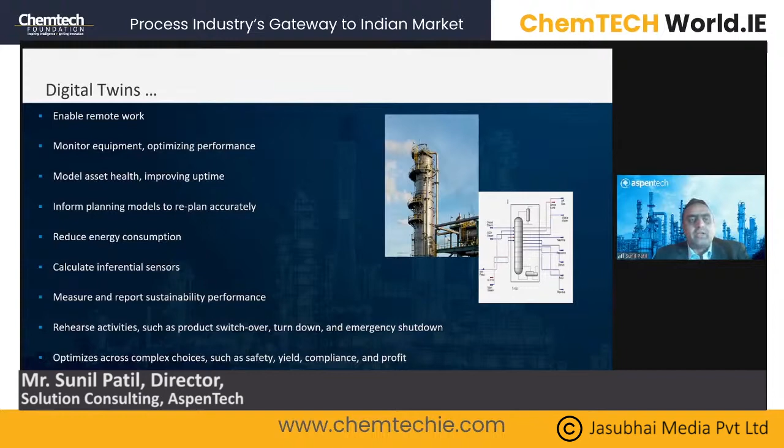Then planning or energy consumption, energy optimization, soft sensors, measuring and reporting sustainability performance—things like emissions, because those are key things one wants to track. So it's a broader thing. It's not about the process model, not about representing a plant, but looking holistically about the entire plant, as if operating it remotely. That's how people talk about the digital twin.

I'll share a picture here that some of you familiar with Aspen Technology might have seen. As you look at this picture, there are three parts: what you see in green color we call plant digital twin, in blue color we call operational digital twin, and in purple color we call process equipment digital twin or operational integrity digital twin.

What this really means is AspenTech is offering a complete digital twin for an asset, not just for a process unit or an equipment, but looking holistically at an entire asset. So this is our view of how a company could look at the concept of digital twin, and it's a considerably broader and more encompassing picture than what is typically projected.

Going back to the blue portion, the operational digital twin—it is mainly about optimizing the operations in the facility, operating assets, as well as planning, scheduling, controlling, execution, distribution, and demand management. All this becomes part of the operational digital twin.

When you look at the purple circle, it is about the predictive and prescriptive digital twins of the plant, where people look at reliability of the equipment or early event detection. So those are the things we look into for the operational integrity digital twin.

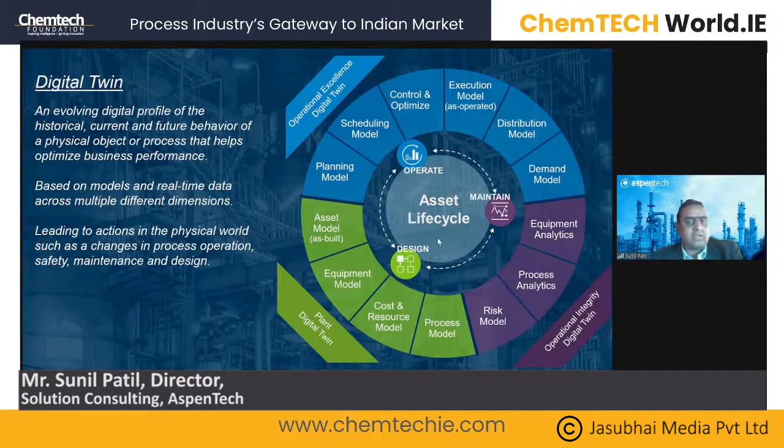Moving forward, I'll share some examples. In the previous slide, we talked about the process digital twin. As you can see from this screen, one example is the plant digital twin. You can see a picture from process simulation, for example an Aspen Plus process model, wherein we actually simulate the real plant.

Real plant using real plant data. One can get the data from a data historian on DCS or SCADA from the plant, connect that data historian to the simulation model, and optimize parameters from the process model. One can actually publish it in the dashboard. Here you can see another picture where I see my current plant performance, what the optimized values are, how much the gap is, and what action needs to be taken.

This is what we call actionable insights. This really gives actionable insights to the operators, process engineers, and operations people in the plant, based on real-time data as well as first principle models. This is a classic example of what we call a plant digital twin model.

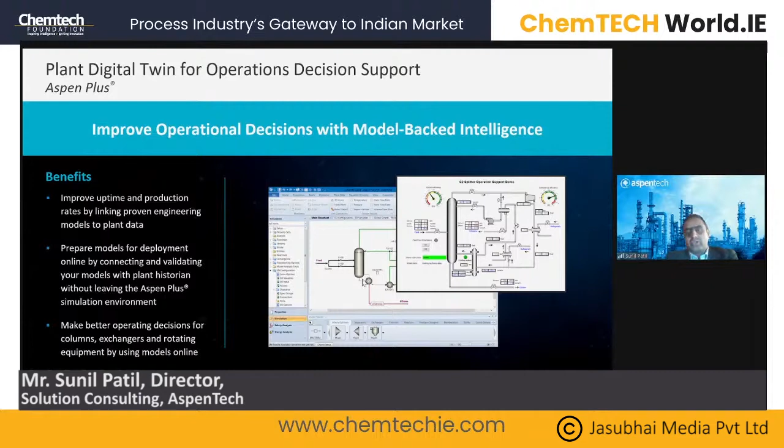This is another example, since I'm talking more about chemicals today. In chemicals, there are a variety of operations - it could be a batch process, semi-batch, or continuous, as well as a lot of solid unit operations like drying, crystallization, and so on. So there's complexity. As I mentioned earlier, when you move from upstream to chemicals, the complexity increases - the process complexity goes up, the reactions, the kinetics, the solid handling processes become more and more complex.

But how do you handle that? How do you simulate that? Do you have accurate properties available? Do you have data availability? Because the convergence, the kinetics, the reaction - it's not straightforward when we move to fine chemicals, specialty chemicals, or even pharma ingredients.

This is actually handled in one environment in Aspen platforms - what we call an integrated process platform, where you handle batch processes, continuous, semi-batch, and solid unit operations in one environment. This really helps to quickly and easily simulate batch as well as continuous processes in one environment. Convergence becomes faster, and of course you reduce the dependency on experimental iterations and so on.

I'll share some examples in a while. For example, companies have achieved significant batch cycle reductions, companies have improved the yield, companies have reduced the energy, and quality has been improved. So those are the key things one can achieve with this kind of solutions.

This is a broader picture. As you can see, I was talking about batch and continuous process in one environment, and one can see the properties - you can have a 3D diagram to really track properties. For some applications, for example, I want to study a transition process from batch to continuous - how do I do that? Or evaluate product purifications or solvent recoveries with different types of solvents or different types of solutions I want to try and test.

One cannot really do all such experiments in the plant, but this is an environment where one can actually test, try, evaluate, optimize, and come up with a solution to implement in the plant. This platform helps process engineers or chemical engineers really optimize different types of chemical processes. Obviously companies have been doing this offline, but now since we're talking more about digitization and digital twin, this has really become online.

What this really means is it's a real-time optimizer where it connects the process model to MES solutions like a data historian, where the models fetch the data from the plant and run at defined frequencies to produce actionable insights for process engineers or operators.

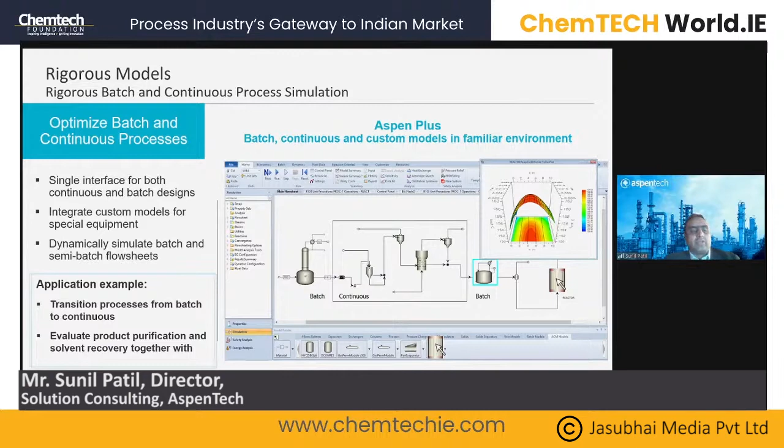For a new polymer grade development, right? Similarly, Hanwha Chemicals from Korea increased the production of LDPE by 5 to 7%, and that translated to significant benefits to them, right?

Dow Chemical did a site-wide safety study using this AspenTech digital technology, which helped them evaluate mixing hazards to avoid accidents and so on. Then Mitsui Chemical Japan were able to reduce energy by 1.5%, which is significant.

So there are a lot of examples, right? We can share this with you, and these are what we call published case studies or success stories available for us to refer—how these companies have achieved significant benefits using this digital technology. The examples are there from bulk chemicals, polymers, specialty chemicals, and large petrochemical plants and so on.

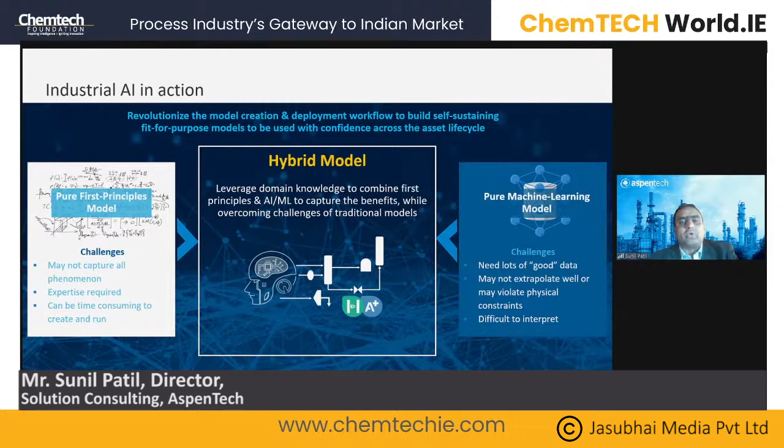Okay, so hybrid models—I talked about that. It's about combining your first principle model and bringing your domain expertise and data into one environment. It's basically about combining your data and model, including the ability to capture complex behavior that in many cases couldn't be modeled. For example, some phenomena or properties like color or morphology are typically very hard to capture in a first principle model, but the hybrid model, together with the data model, certainly helps address those kinds of challenges.

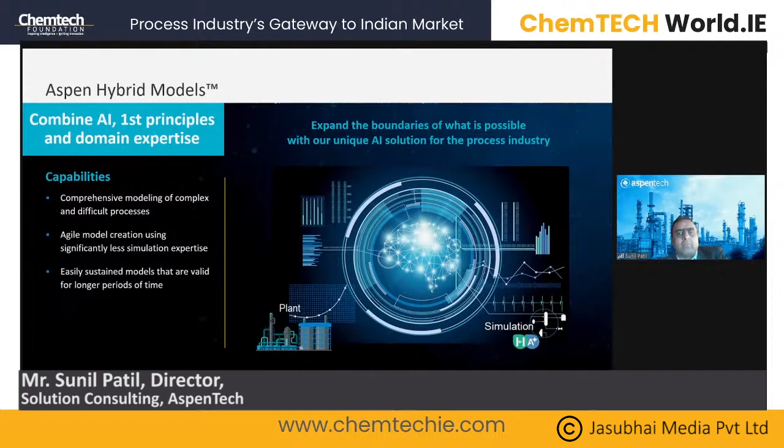Again, as I said earlier, it is about combining your AI, artificial intelligence, and the data with the first principle model. That's what we really bring together to solve these industry challenges of complex models, or models which are hard to simulate, right? Very specific geometries, or ones which are very proprietary. And those could be addressed using this kind of a combination.

Okay. Yeah, and I said already, the problems that cannot be easily modeled can be modeled here. Difficult and complex processes, we can simulate here. The process engineers can model processes and assets that cannot easily be modeled with first principles alone. You get the accuracy of empirical models, the strength of first principle models, leveraging the power of AI with the different algorithms built in here.

And of course, as you know, AspenTech has more than 40 years of domain expertise in this area. So combining all this together, this is what we call the new innovation we have done in the process simulation or process modeling area, helping our customers solve any kind of complex process, be it very complex equipment or a large asset, helping companies increase yield by 1 to 5%, increase throughput, as well as reduce energy demand. Okay, so that's how companies are really trying to achieve it.

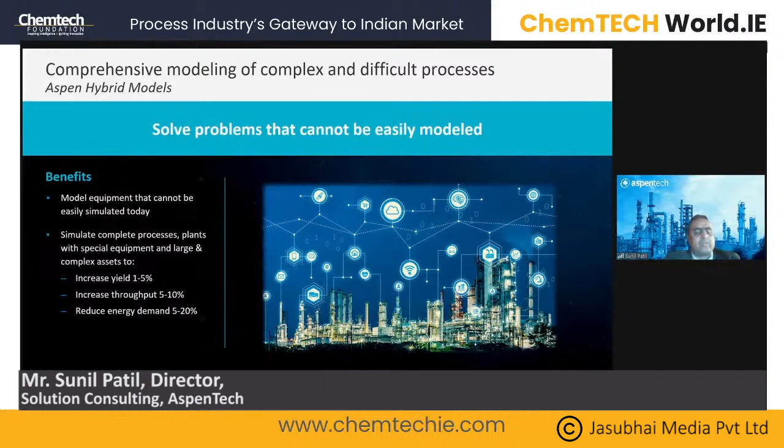Now, if you look at sustainability, it is also important the model has to be sustainable. Because the new generation are really technology savvy people, but it is also important that they have the skills to sustain and maintain the models. So AspenTech is ensuring that when the models are developed and implemented in the plant, they are easy to maintain, easy to calibrate, or faster to calibrate at a defined frequency and so on.

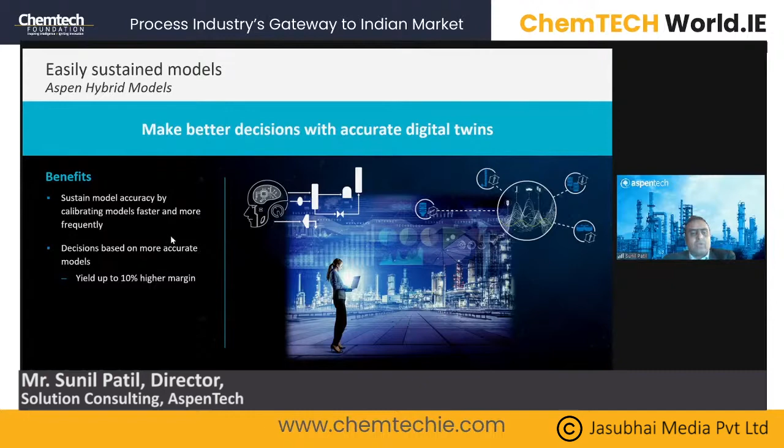So it is very important for us that we develop the model, but at the same time, it is easy to maintain and sustain by auto calibration, or by making sure that it is easy to calibrate for the engineers. Okay, this is another example.

As you can see, this is again an example of a hybrid model. In the diagram, there are different process equipments simulated using your first principle model, for example the distillation column, pumps, heat exchangers, and so on. But at the same time, we have a model built into the hybrid environment, what we call a data-based model. So we can build it in the AI model builder and bring that into the process

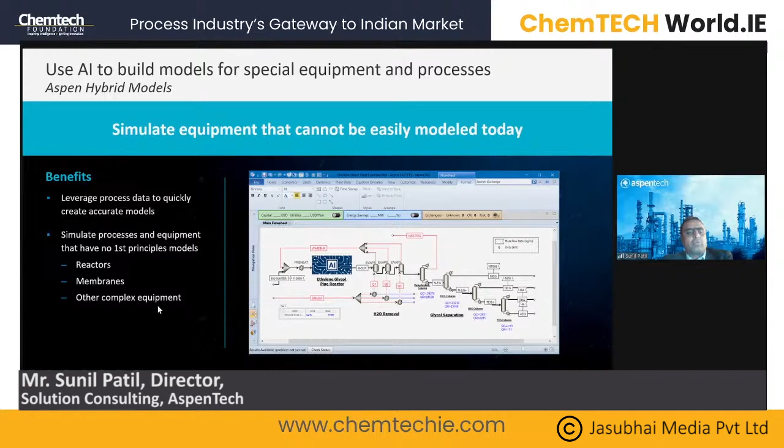simulation environment. And this combined model, a combination of first principle and data model, is simulated in the process simulation environment, what we call a hybrid model. So as you can see, you can have reactors, membrane kinds of units, or all kinds of complex process equipment simulated in one environment.

Okay, so let's talk about an example. Do we have a real example of these hybrid models? Yeah, of course, we have a lot of examples. From a confidentiality perspective, we may not be able to share the company name, but this is an example from a large petrochemical company in Asia. This is a polymer plant where they deployed this hybrid modeling technology, the first principle combined with the data model. The goals were to reduce the transition time, reduce the waste of polymer grades,

and at the same time, they had the LDPE reactor model, which does not calculate the key properties. So the solution was the standard LDPE model developed in Aspen Polymers. They used this AI-driven model in the same environment, and the benefits, as you can see on the left-hand side, the value created is significant. A 50% grade transition time reduction, which is significant.

The savings are almost $723,000 US per year, which is again significant for such a plant. And they also achieved the waste reduction target, basically their sustainability goals. So this is very important.

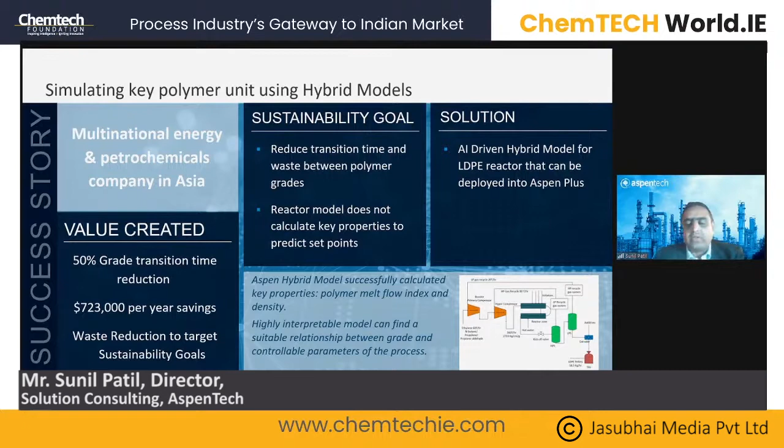So we can talk, or we can find out what could be the use case where these data-driven and first principle models can be used. Okay. Then next, finally, about the plant digital twin.

Now here, this is again a classic thing about the plant digital twin, for example, the column. This is a typical example in any process industry for the plant digital twin: when we have to do the hydraulic visualization of a distillation column.

Typically, as you know, columns are really the key things for efficiency, and some of the hydraulic things in the column, for example column flooding, column weeping, or the trays and the packing geometry, are very difficult to understand, typically when you have to do debottlenecking or turnaround studies and so on.

But using these AspenTech plant digital twin technologies, one can really quickly do operation decision support, improve margins, reduce emissions, and so on. How is it possible? Because we have a column hydraulics capability where one can actually see what's happening inside the column.

It's not just judging what's happening inside the column by looking at the pressure, temperature, and flow profile, but one can actually see in a dashboard what's happening in each tray, what is my hydraulic situation, what is my pressure drop, is there any physical constraint in the column. And that really helps to address any constraints or challenges for column operations in the plant.

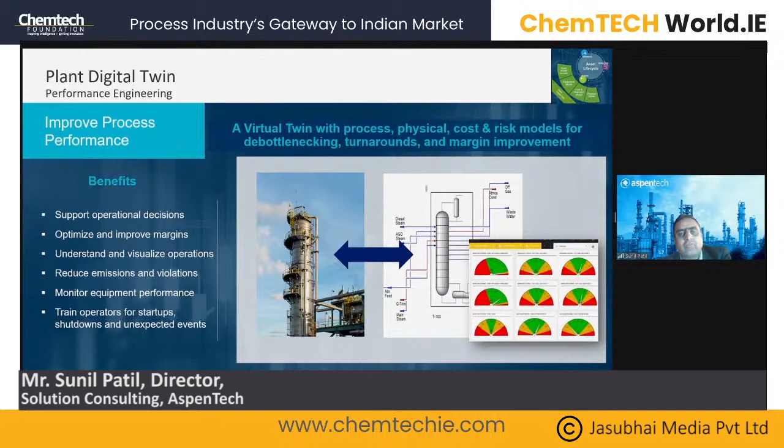So what are the key benefits? I talked a lot about digital twin, two things: one, digital twins based on first principles, which companies are already using, and what we call the next generation digital twin, based on hybrid modeling, which brings data models together with first principle models.

I gave an example of a polymer plant, like grade transition reduction, cycle time reduction, or reducing off-spec. But to summarize the typical benefits: from a chemical, spec chem or pharma point of view, companies are trying to optimize reactor batch time, reduce process cycle time, reduce impurities, and of course golden batch selection.

Golden batch selection is a known word in the polymer industries, if you are familiar with it. So how do I recognize the golden batch? Comparing the runs over several months and several batches, determine the most optimum operating conditions in the plant. The other thing is the soft sensor.

This is very important because I cannot measure all process parameters at all places in the plant. And if I depend on lab analysis, it's time consuming, with delayed lab results. And of course, faulty instruments and instrument errors are secondary challenges. So soft sensors are very important. That's another advantage of this process digital twin.